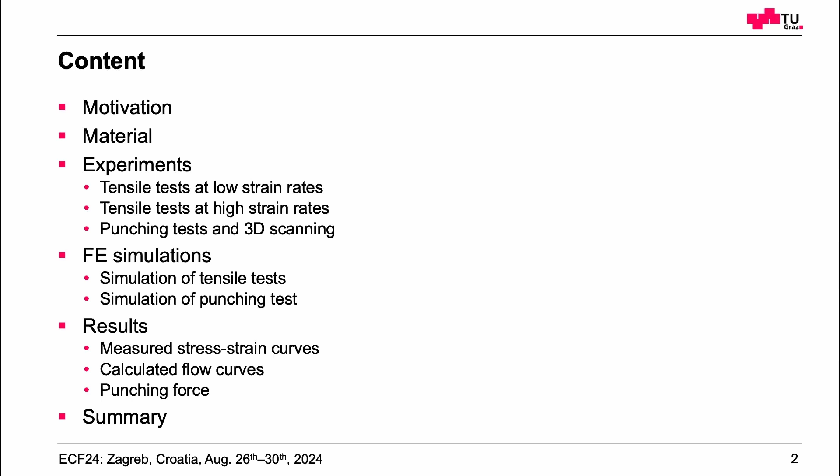What was our motivation for this project? The electrification of the mobility sector will multiply the demand for copper and its alloys in the future. And the industry always focuses on efficient processing of these materials or sheets, especially for cutting, punching, blanking processes. And therefore, FEM simulation becomes more and more important. And this requires reliable material data, especially the elastoplastic behavior and the fracture behavior.

Also, we have these processes at room temperature, and they are quasi-static processes. But locally, we saw in our investigations, we have strain rates from quasi-static up to several hundred per second. And also the temperature is locally from room temperature up to several hundred, so 300 degrees. So this is the region where we wanted to determine our material parameters.

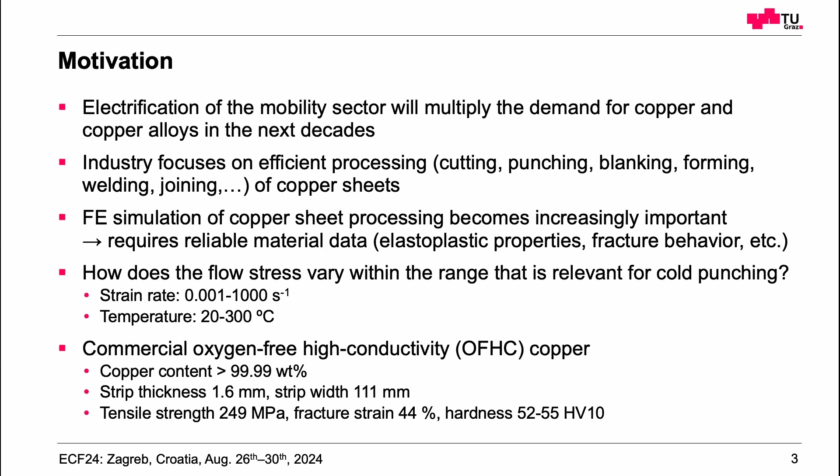What was the material we used? We got a commercial oxygen-free high conductivity copper. This means this copper has nearly 100% copper content. And the strip thickness of this material was 1.6 millimeters.

Now I show you which experiments we performed. First, we did uniaxial tensile tests at low strain rates. There we used our Instron E10000 electromechanical testing machine. There we have the possibility to use a convection furnace, and it was possible to perform these tests from room temperature up to 300 degrees. And we tested strain rates at quasi-static and also at a strain rate of 0.1. And the strain was measured by using a clip gauge directly on the sample in the furnace.

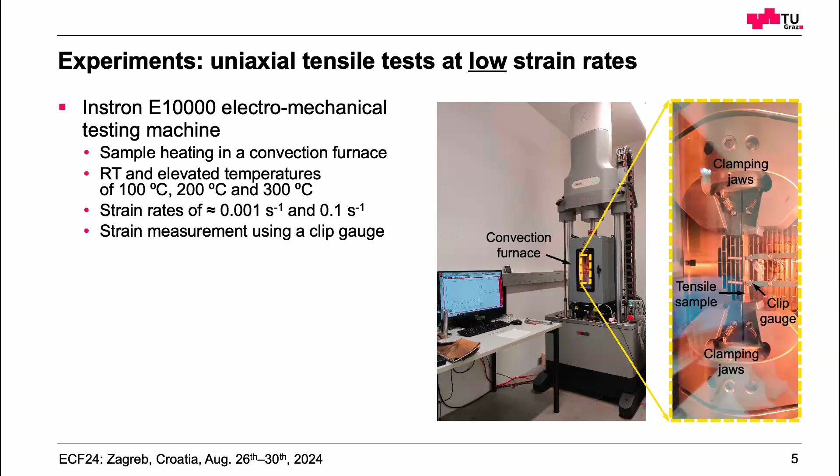After this, we also performed uniaxial tensile tests at high strain rates. Therefore, we used a split Hopkinson pressure bar. And here it was also possible to heat up the samples, but it was only possible to do the test at room temperature and at 100 degrees. And here we performed tests at around 230 per second strain rate and very fast tests at 950.

Sorry, the videos here don't work, but it's not a problem.

The strain was measured by using a DIC system with a high-speed camera.

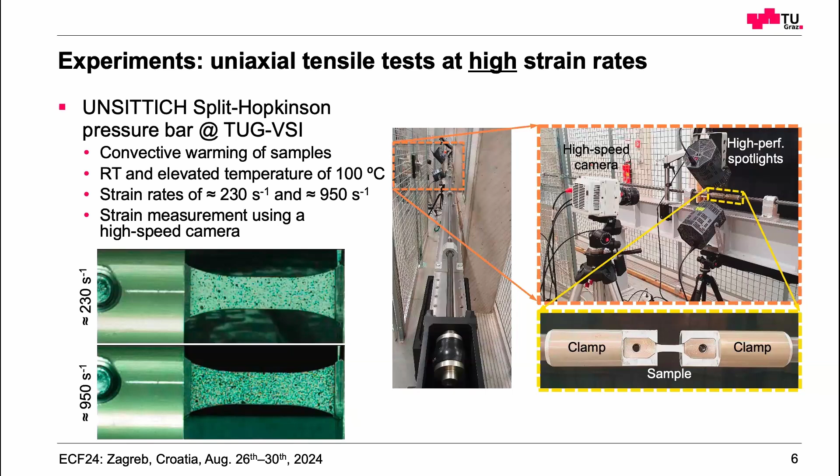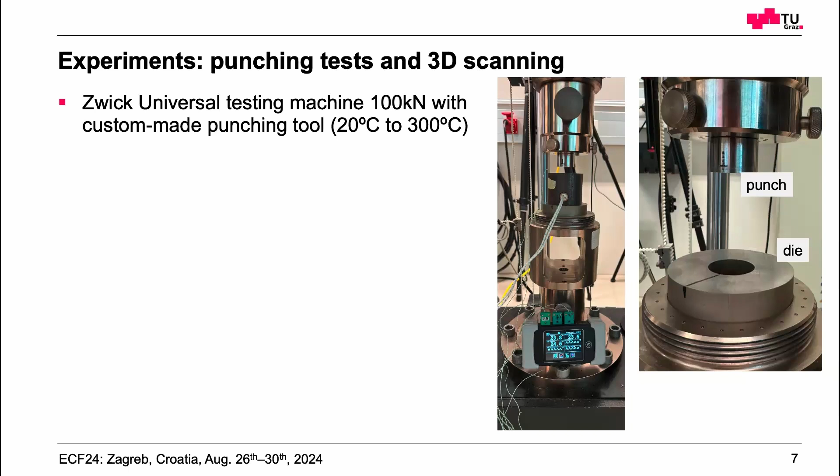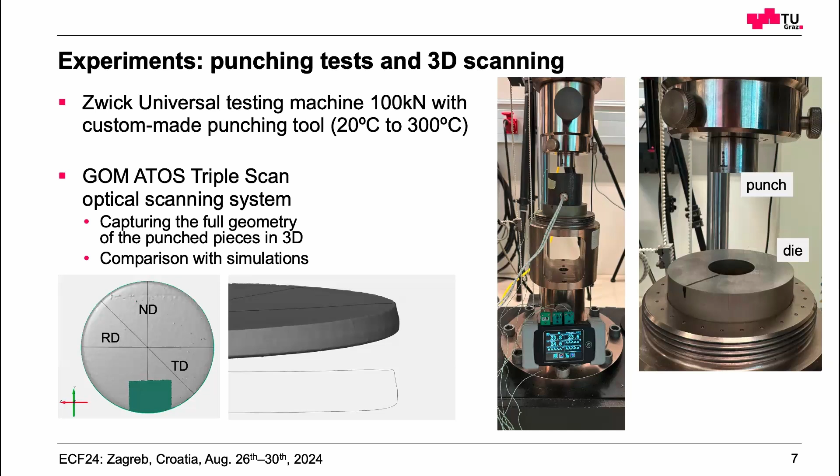To verify the material model we developed afterwards, we made a custom-made punching tool ourselves in our Zwick universal testing machine, which has a maximum force of 100 kilonewtons. And there it was possible to punch these copper sheets at different temperatures, also from room temperature up to 300 degrees. These samples which we produced, we measured afterwards with our optical scanning system from the company GOM. And here you see such a part which we produced and measured afterwards. And this is afterwards the comparison with our simulations.

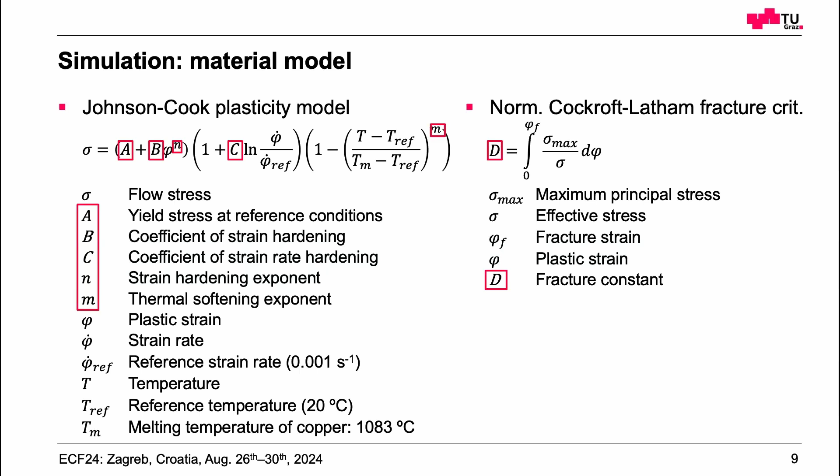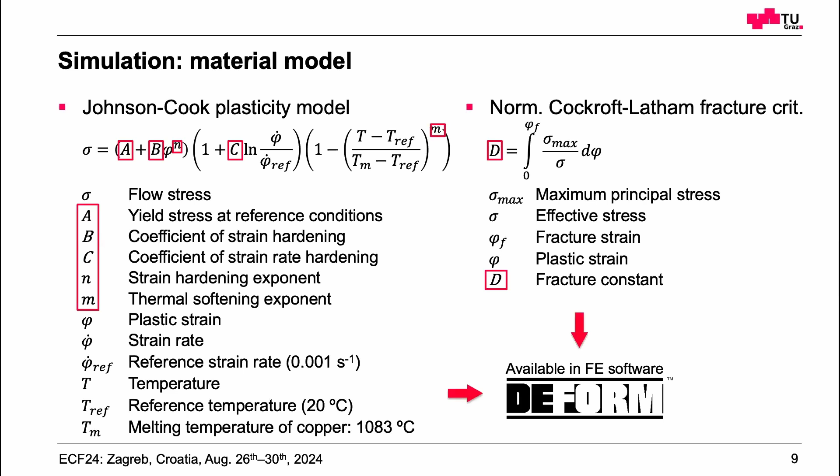Now I come to our simulations. For the material model, we decided to use the Johnson-Cook plasticity model, and for the fracture criterion, we used the normalized Cockroft-Latham criterion. These are the parameters we then optimized and iteratively determined. And the good thing is these parameters are all available in the commercial FEM software DEFORM, which we used for our simulations.

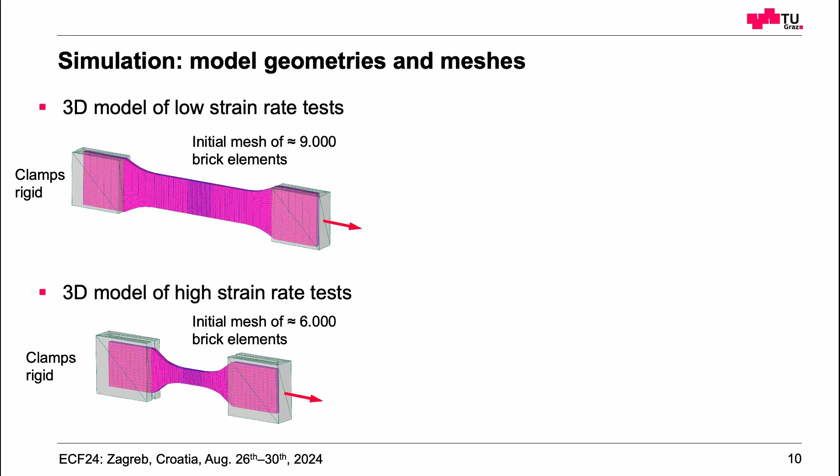Here you see the simulation models of our tensile test for the low strain rate tests, and on the lower side, the smaller sample geometry for the high strain rate tests. And this is our simulation model, a 2D axisymmetric model for the punching test. The punching test was performed in reality and also in simulation as quasi-adiabatic punching with a velocity of 100 millimeters per second.

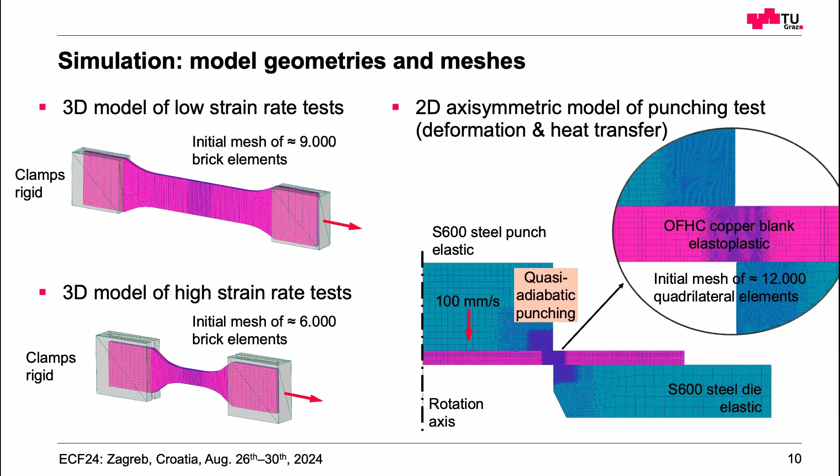Okay, I come now to the results. Here you see our measured stress-strain curves. We performed all the tests with 3 repetitions. For the lower strain rates, we determined curves for 4 temperatures. And for the higher strain rates, we have also 3 repetitions and these 2 temperatures.

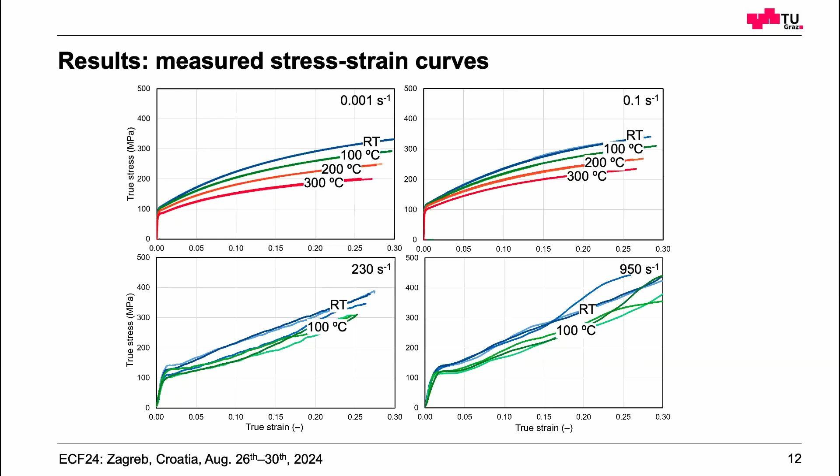From these real tests, we optimized our Johnson-Cook plasticity model. There we saw we had a problem at lower strains because the stresses in this Johnson-Cook model were too high, and therefore we implemented a correction factor, which you see here, and this adapts our standard Johnson-Cook model to our modified Johnson-Cook model in the region of 0 to 0.2 strain, and lowers the stress in this region. This was very important, as I'll show you afterwards.

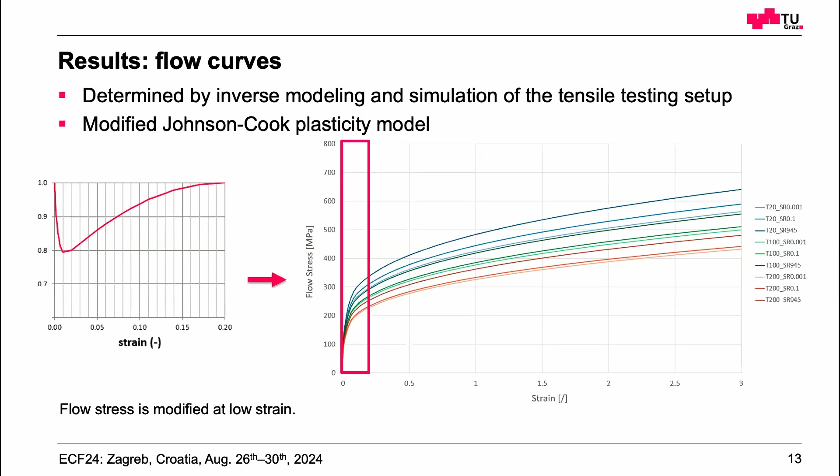Now, these are the results of our modified Johnson-Cook plasticity model. We simulated the low strain rate and the high strain rate tests. And you see for a constant temperature, we have the different strain rates. Red is the real test, and gray is the simulation, and they are very comparable, or quite the same. This is always force over displacement. Why is the force for the high strain rate lower? Because the geometry is smaller and therefore the force is smaller.

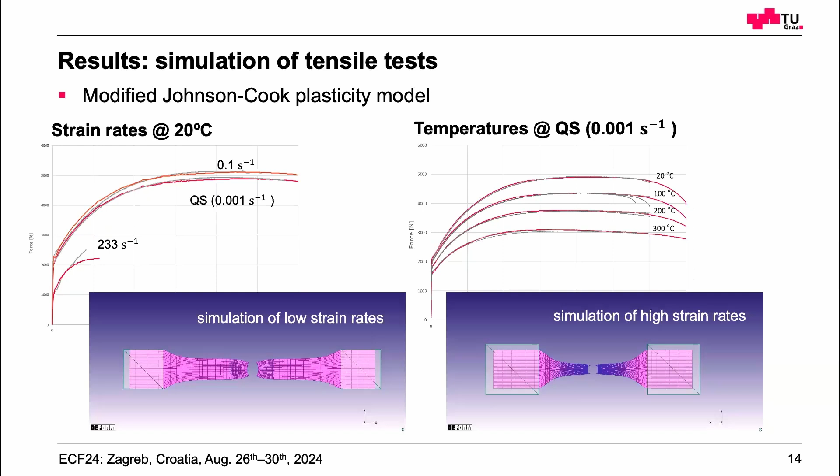We have the same diagram here with a constant quasi-static strain rate, and here you see our curves for different temperatures. And so our plasticity model matches the real testing really well.

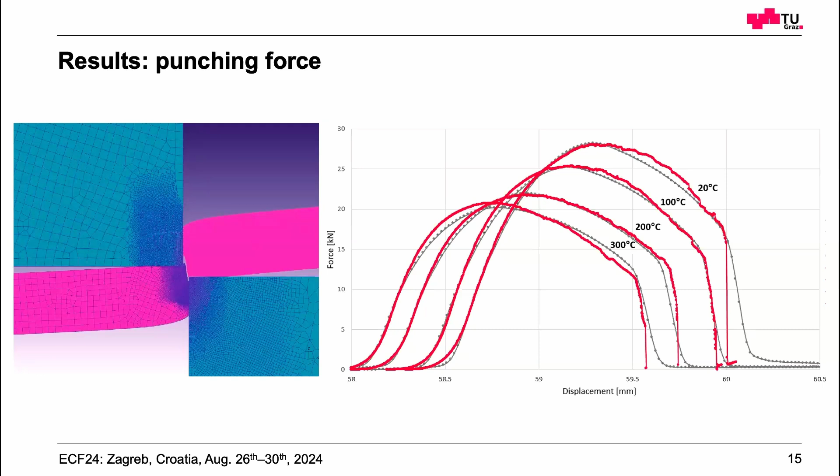To compare with the real punching, we did the simulation of the real punching. And you see here also the force over displacement curve from our real test, which is the red color, and the gray curve is our simulation. And you see our model matches the real testing very well.

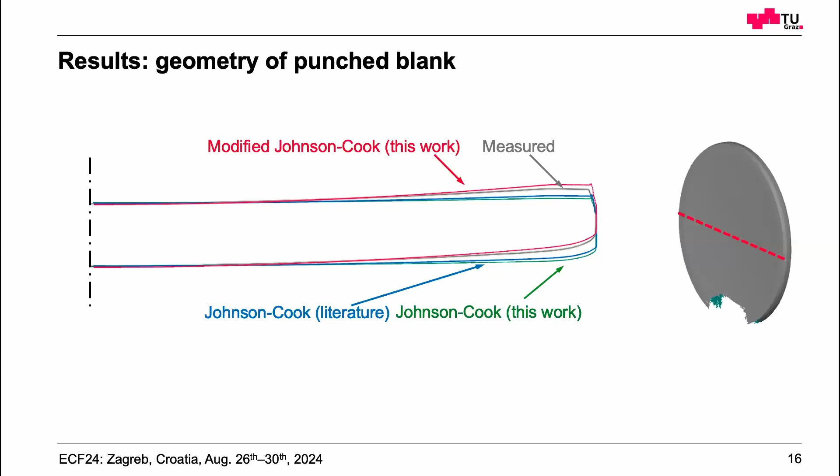So, short summary: the flow stress of this copper was investigated for strain rates from quasi-static to 1000 and a temperature range from room temperature up to 300. The flow curves according to the classical Johnson-Cook plasticity were iteratively determined by inverse modeling. A modification of the classical Johnson-Cook plasticity was proposed to decrease the flow stress for low plastic strains, to consider this early yielding.

And the flow curves were successfully used for FE modeling of the high-speed punching process for these copper sheets. We used a constant fracture parameter for the normalized Cockcroft-Latham fracture criterion, and this is appropriate for punching simulations.